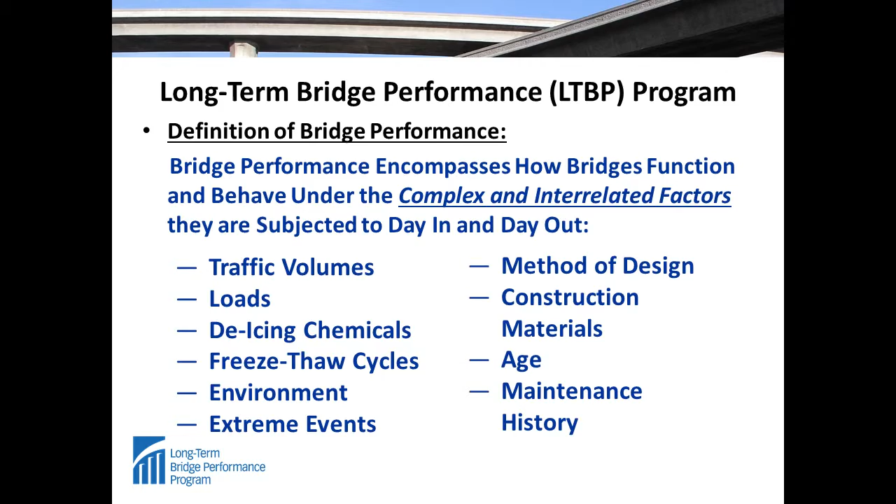So there's a vision, and the mission is to foster improved bridge performance, health, stewardship, and management. And this is really key to what we're talking about here in terms of preserving your bridges. You need to preserve these bridges so you can see how they perform. Coming up with some decision-making tools. So all this is part of the program that's being done out at Turner Fairbanks.

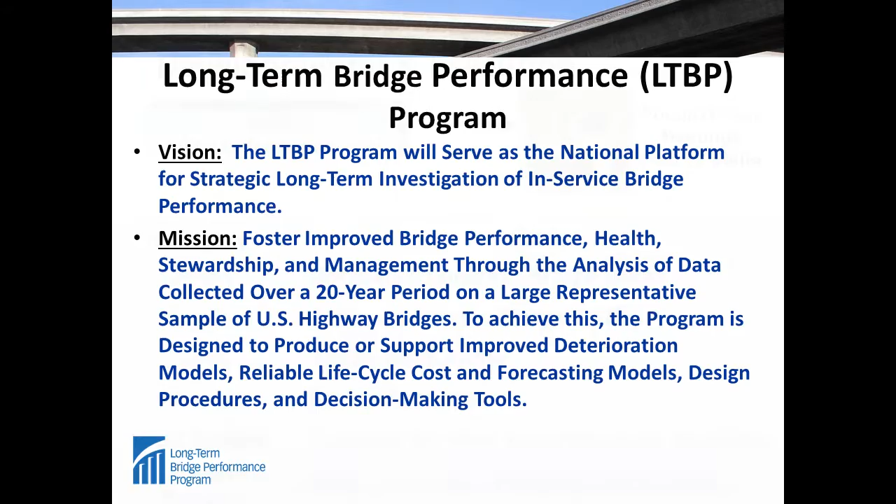So the first thing they did was they identified the bridge performance issues. There's a theme here, the same thing that we just talked about, really. Decks and joints and bearings and your steel and concrete superstructures. And look at the issues there, the same things that we just talked about. So it's very clear that there's a synergy between what we're doing here with bridge preservation as well as what they're looking for in the long-term bridge program.

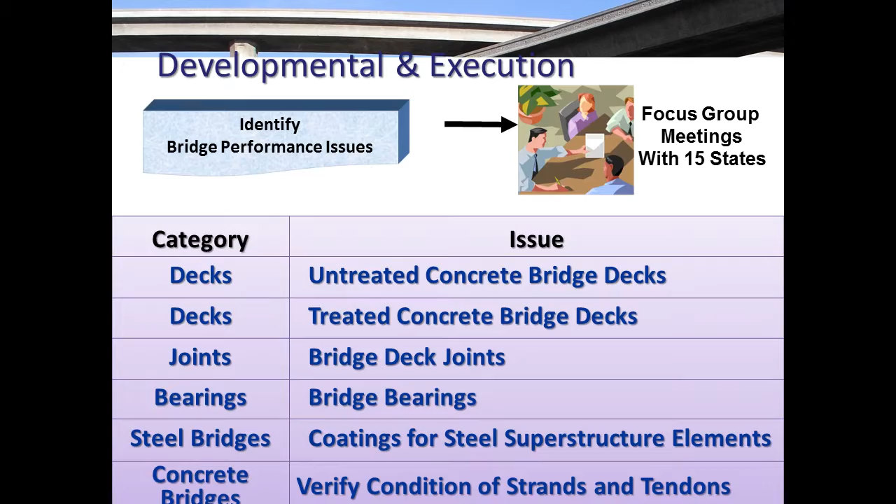So the way they set that up is they're looking at bridges basically in clusters around climate zones. Okay, so you can see this is the map of the U.S. We had the cluster down in here, what they're calling the Gulf cluster. WSP-PB is actually doing the western cluster, both northwest and southwest. And Rutgers and their consultant had done the mid-Atlantic. So those are the clusters that have been done.

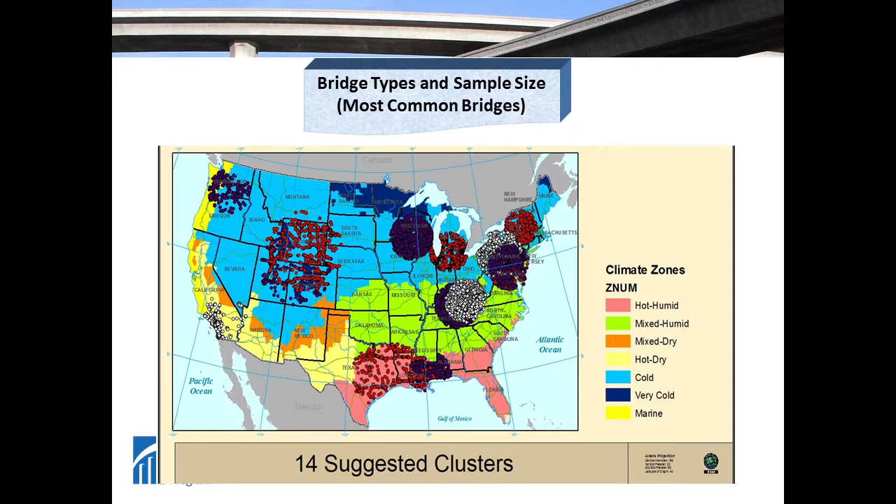And for the folks in this room from Tennessee and North Carolina and Georgia and Kentucky that haven't actually been in a cluster yet, one cluster is this Tennessee Valley. I don't know if that's still the name of it, but it was a Tennessee Valley cluster, which will pick up your states. But then the other thing, when you look back to the issues that are impacting the way bridges perform, is really how they're used.

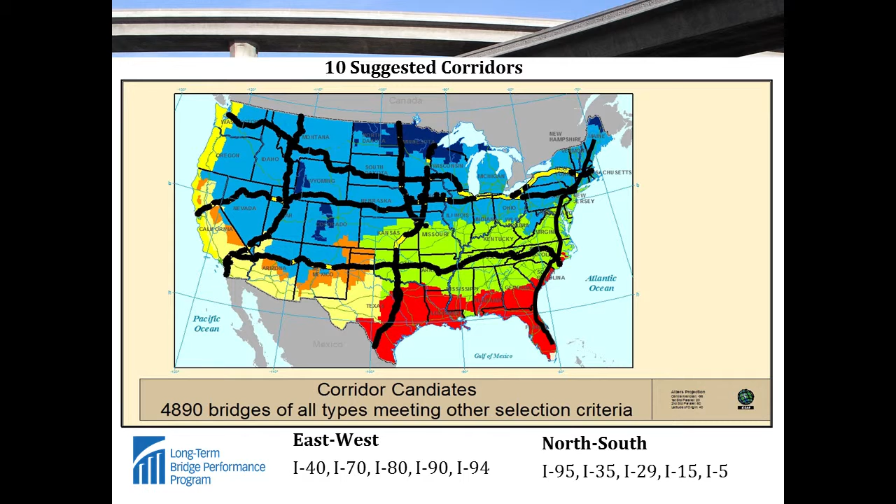And so they also looked at 10 suggested corridors, and other bridges will be picked off these corridors. And that's also where South Carolina, Tennessee, Arkansas will have some more bridges based on a cluster along I-40. And then a lot of the other states, Georgia, Virginia, as well as the Northeast, Florida, will have some on I-95, and Texas will have some more from I-35. So essentially, you're going to have a couple bites of the apple in different states, and basically the clusters and corridors are how they're grouping those projects.

So as I mentioned, we're looking to try and have some products that are available to the owners. And here are some of the things: they've done protocols on how to do the inspection and do the data collection. There is a bridge portal that's available. Several of you in this room I know are the long-term bridge coordinators for your states, so you've seen some of this stuff.

They're working on developing this data-driven deterioration modeling. They've got the methodology down. Now they're trying to populate that with the data that we collect. And there's a whole host of NDE technologies. Talked a little bit about the Rabbit earlier, and there's a picture of that in here. Coming up with a long-term bridge performance index.

And the bridge practice timeline, that's really kind of interesting because, as you all know, bridges were designed that are still in use right now with a different set of specifications and a different set of design standards. And then that gets modified. So how are those bridges performing versus bridges that are designed with different standards and different specifications? So that's all been developed to try and help them take the data that we're gathering and others have gathered to see how the bridges perform.

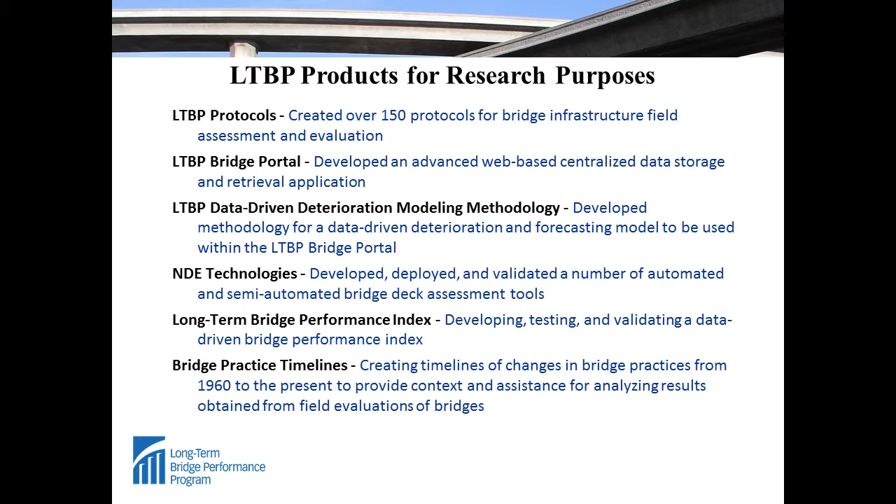So this is what I mentioned earlier about what we've done on field data collection. There's the Mid-Atlantic, steel and pre-stressed concrete. What we did, the Gulf steel and Gulf pre-stressed concrete, and PB's doing the Northwest. I guess that's WSP and PB now. The Northwest pre-stressed and concrete.

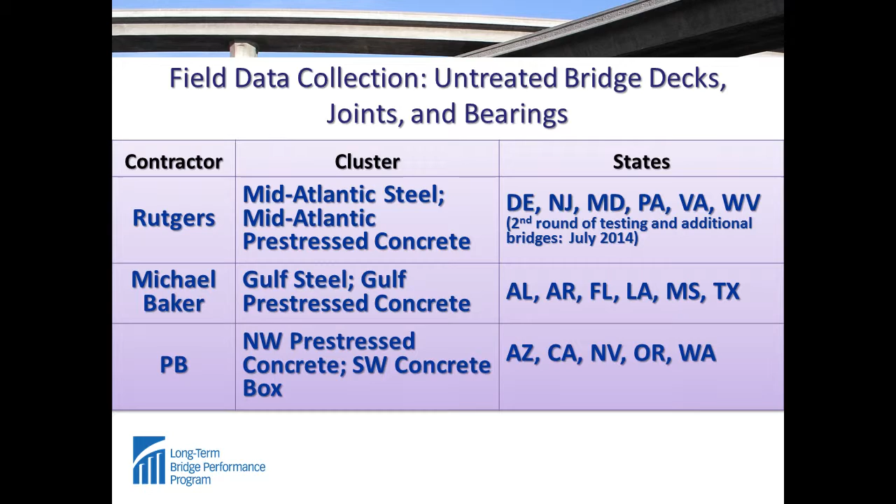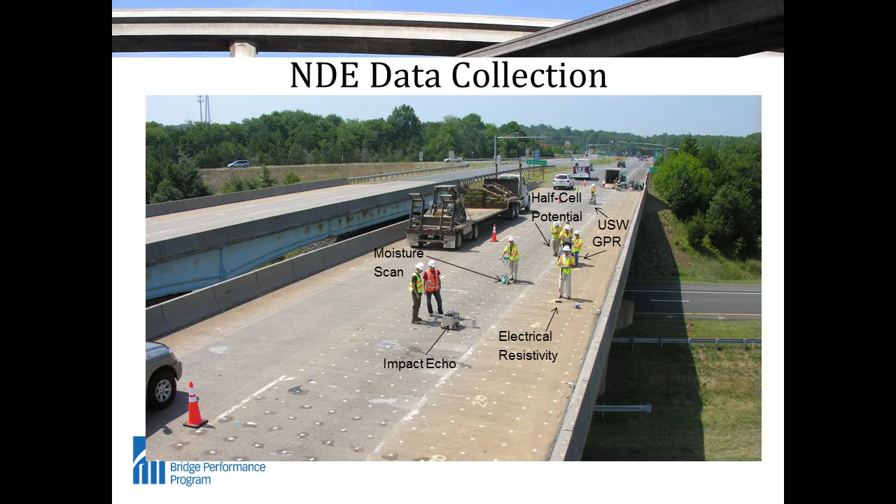But as you can see, this method is very time consuming. You have to take out lanes. And so thoughts are, how do we improve that? What's next? And so that's actually where this RABIT, the robotic assisted bridge inspection tool, came from. Now this is, I think this is actually the second. They had a prototype and then this one.

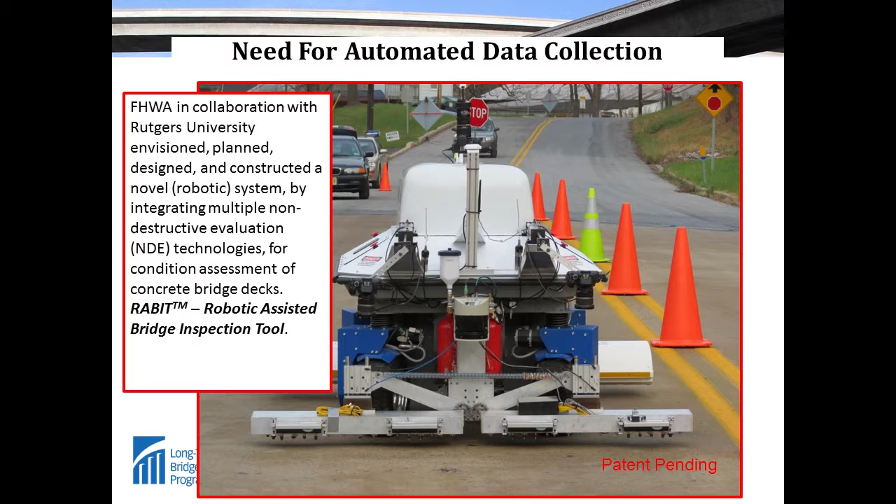And I know when I was here last year, we talked about getting this out to the Gulf region bridges, and I asked that question, and for some reason I was not given approval to get this out here. So if you want to ask your FHWA representatives again, maybe they can do that. But I do know that Federal Highway did request and are in the process of having 5 more built. And my understanding is that the next wave of data collection, which I'm going to talk about, they will be part of that program. So perhaps you'll get this out here when your bridges get done in another cluster or in the corridors.

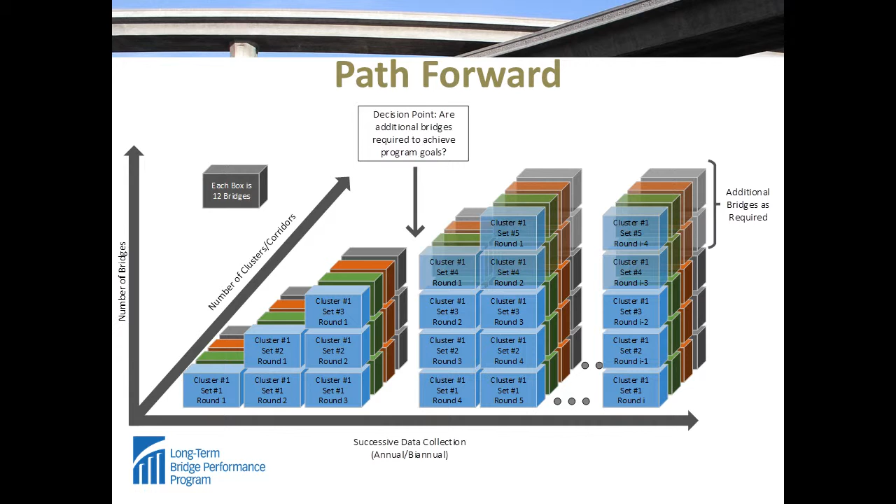So this is kind of the path forward. I was privileged to go to, I guess it's the Bridge Advisory Committee that's guiding the work for the long-term bridge performance. And this is kind of what they're looking at as their path forward, is they add clusters, and then you would re-inspect that cluster like this, and then you'd add clusters, and there'll be a decision point in here to say, do we have enough bridges to check and see, are we getting good results in our performance modeling? So there'll be decision points in there. But this is what they're looking at doing next.

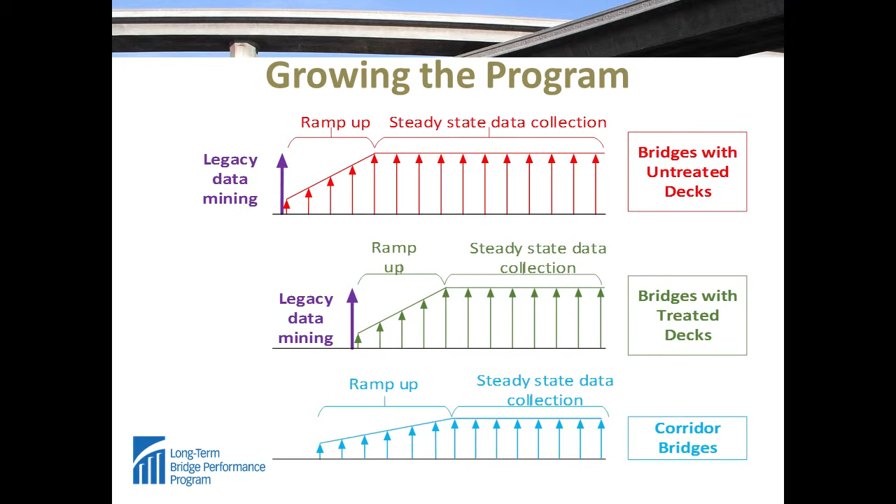So right now we're basically done with our field inspection, and I'll talk about that in a minute. But the next wave will be coming out where they're going to do those other clusters that I mentioned, as well as the corridors. There was a discussion at TRB this year that they would have an RFP on the street to add about 800 bridges to the data, collecting data for 800 bridges in these areas. And again, this is kind of how they're looking to do the work.

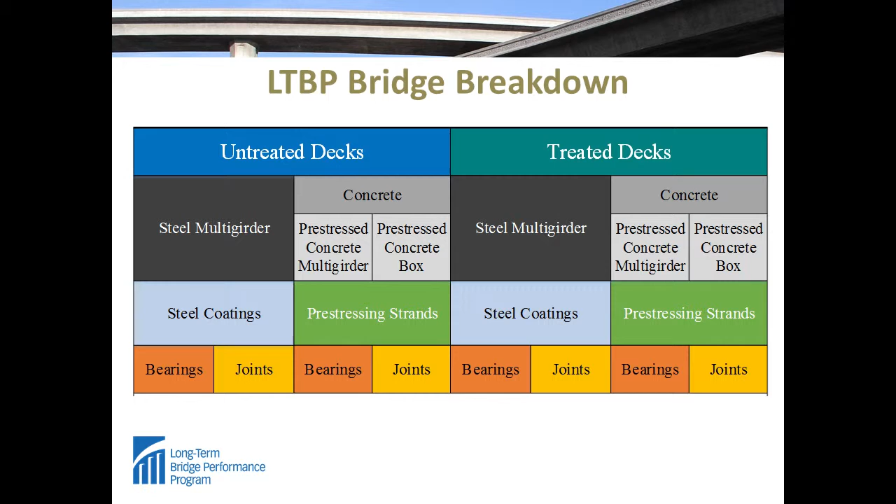Right now we're doing the untreated decks. We actually did element level inspections for the girders as well as the bearings and joints. I know out in the west, though, I think PB is only doing the decks and the underside of the decks. But this is kind of how we're doing it. So the first thing is the untreated decks, then there's going to be the treated decks, and we're going to pick up all these other things as we move along.

So an update on what we've done here. As you can see, we've basically completed the field work. I really do want to thank the folks from Arkansas, Florida, Texas, everybody, the guys in this room that have seen me a couple times now, and they're saying, why is this guy from New Jersey here? But they've been great, from Mississippi, Louisiana.

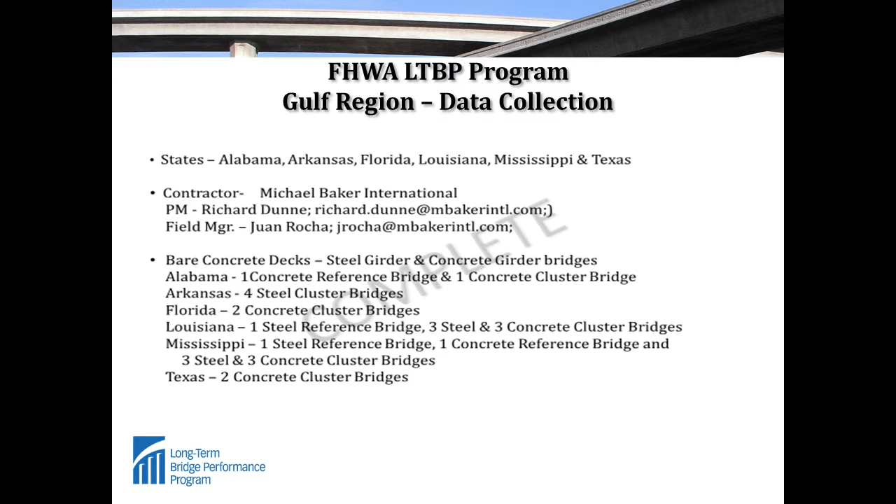Everybody's been really, really great in helping us get these bridges done, because we're done and PB is not done yet. And we started at about the same time. And I attribute that to the folks in this room that gave us great help in getting out there and doing our work.

And I want to get from the owners that we did this for, how would you like to see this information? Because the data that you get on the Advitam report is really just that. It's all data. There's no real description. It's just really pictures and ratings. And then on ours, there's a little bit more narrative to it and some other things.

And when I send this to y'all, what I want you to think about, do you notice how I dropped that y'all in there? It's a guy from the north.

When I send this to y'all, if you want both, tell me, or however you want to see this information, and then I'll work with FHWA to get the appropriate releases so that we can formally send it to you. And we'll also probably work with PB on what format they're trying to get, so that you guys get that data, because I think that's really, really important. It's also one of those short-term things that you see of value coming from the program.